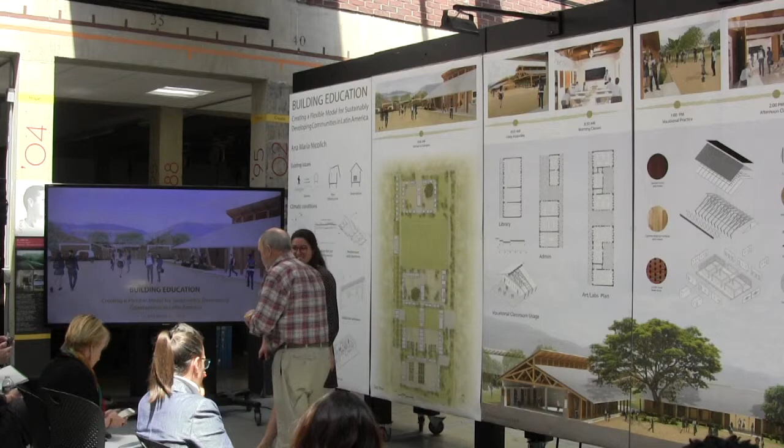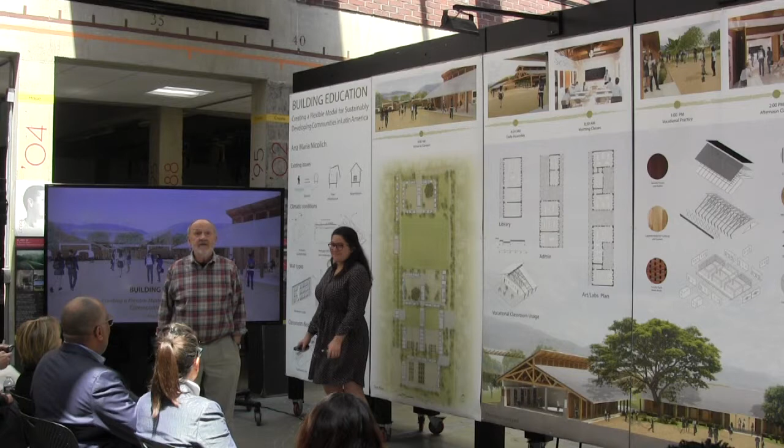So without further ado, we're going to leave North America and go down to South America. Remember that the sun acts differently in the southern hemisphere, right? Please remember that about east and west, north and south, and things like that. And the toilets go the opposite direction. In any event, Ana's going to take us there and show her project, which is in Peru.

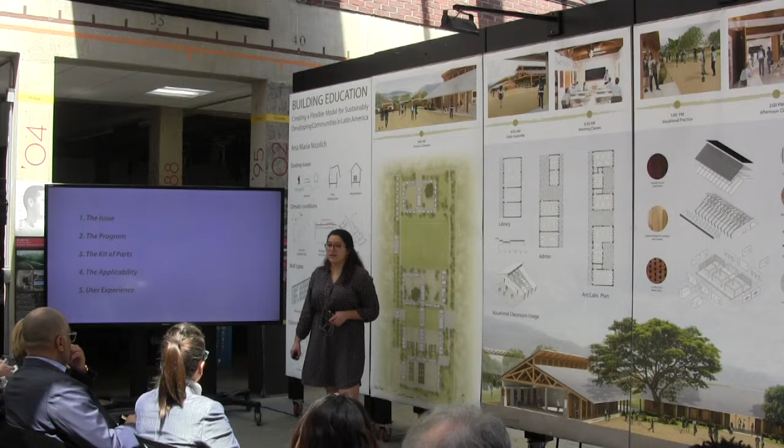Right now, I would like to talk to you about building education and the design of a flexible model for a high school for sustainably developing communities in Latin America, and more specifically in Peru. This presentation will deal with some of the issues that have inspired this thesis, how those have led to the creation of a program for a model for a school, the kit of parts that make up this campus, and how it could be applied to different communities with varying needs.

To finish off, I will share some user experiences to get a better idea of how this campus can be used. To begin, some of the research I have done has been through the World Bank, the United Nations, and similar organizations, and they have all concluded that quality education is a key component in order to have a prosperous and successful country.

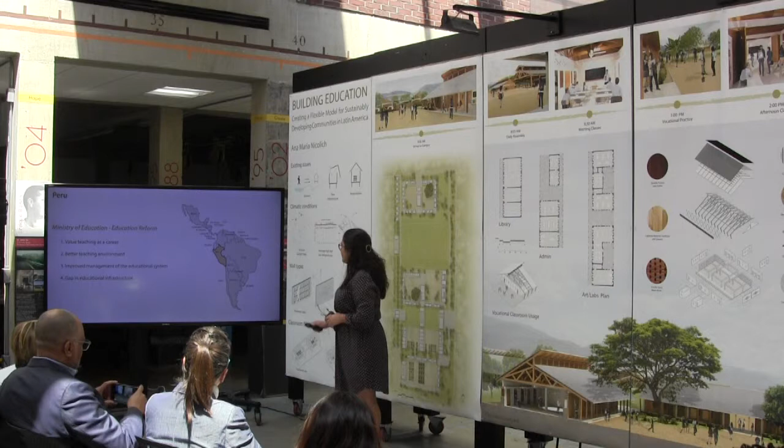Specifically in Latin America, all of the leaders in the field of development currently are making education their #1 priority. We can take a look at Peru a little more closely, and even though there have been significant advances in the education reforms they have done, there's still a long way to go.

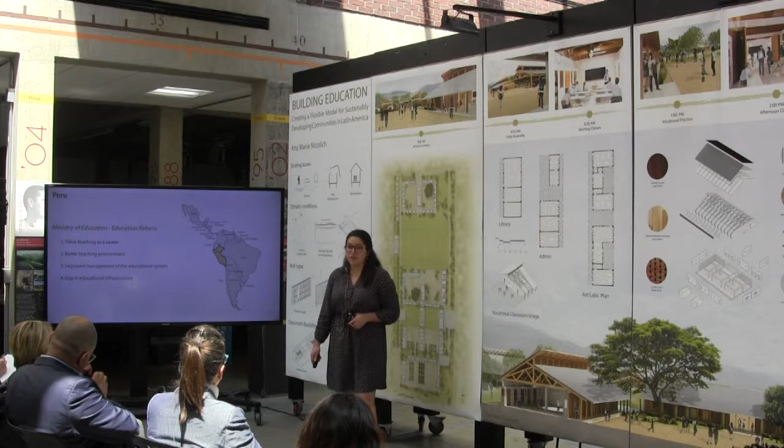Knowing their responsibility and in order to provide quality education throughout the country, they have recently released an educational reform with 4 main points: one is to value teaching as a career; another is to better the teaching environments of these educational spaces; another is to have improved management of the educational system as a whole; and to bridge the gap of the educational infrastructure.

This thesis will specifically deal with bridging the gap of educational infrastructure. But we'll also try to tackle valuing the value of teaching as a career by creating spaces that can help teachers feel valued, and by creating better teaching environments for improved learning.

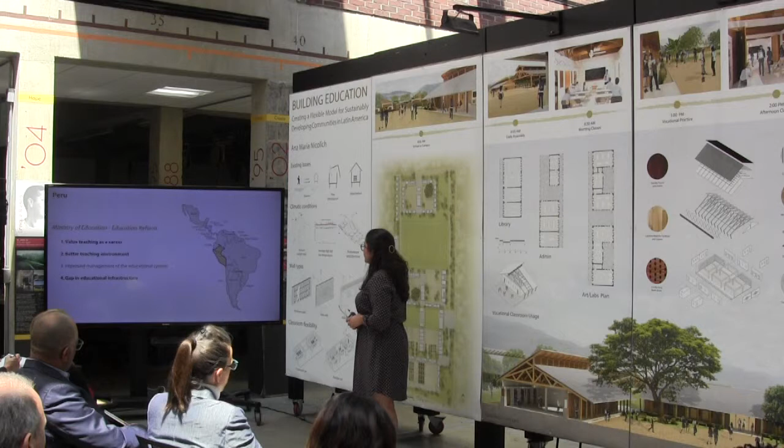Unfortunately, currently in Peru, there's only a 65% completion rate of secondary school, which consists of 7th grade through 11th grade. The 35% of students that do not complete secondary school are going through hardships with their family in terms of financial means, and so they end up staying home and working for their families, or they might lack motivation because they've seen that their parents didn't finish high school, so they might not be as motivated or encouraged to continue on.

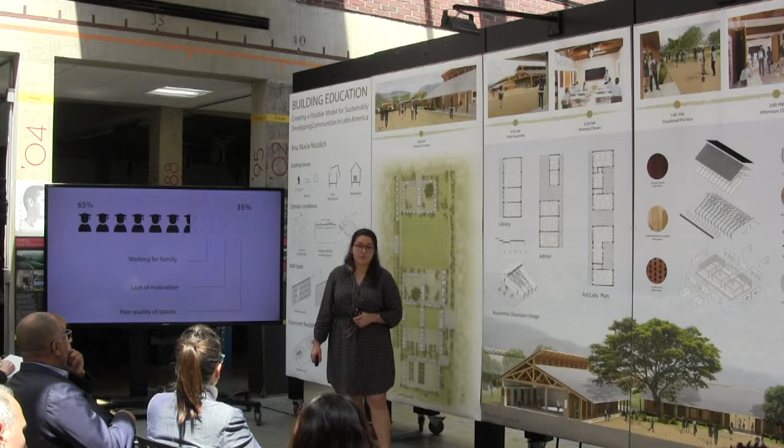One of the main reasons is the quality of the spaces. I will show you some imagery in order to get a better grasp of the state of the infrastructure over there, and here you can begin to understand it.

A lot of the classrooms might be -- sorry, I forgot to mention that all of these issues are most prevalent in the Peruvian Amazon, and that's where this thesis is located. So here you can start seeing some of the infrastructure.

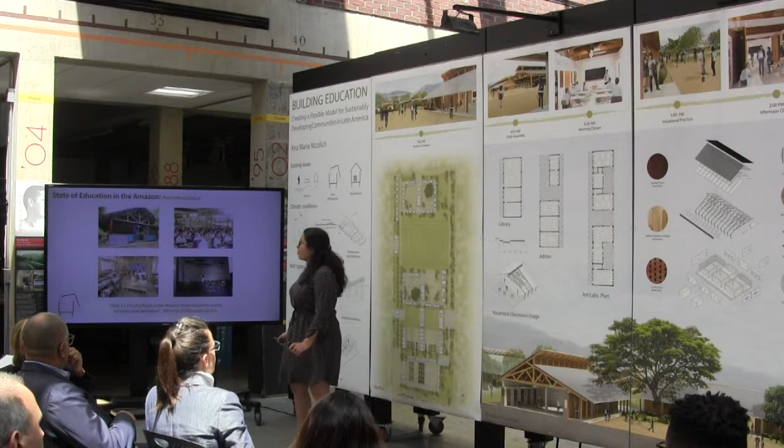They use roof systems that do not necessarily respond to the climatic conditions, providing poor acoustical conditions in the classrooms, and they have very few resources. Some classrooms even have missing roof parts.

This poor infrastructure, combined with long commutes to classrooms, leads to students not completing school. The Peruvian Amazon takes up 60% of the Peruvian territory, so you can imagine how much of the country is dealing with similar conditions.

The average commute for a teacher or student is about 5 hours a day, and that commute usually happens either by the peque-peque boats you can see in that first image, or by walking, or through public transportation on scarce dirt roads.

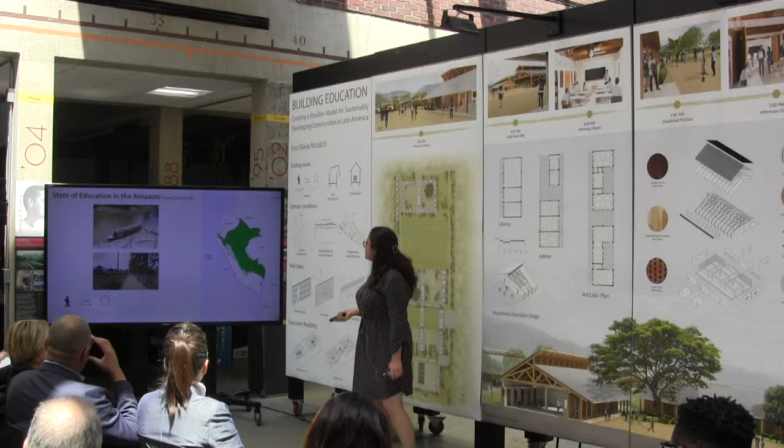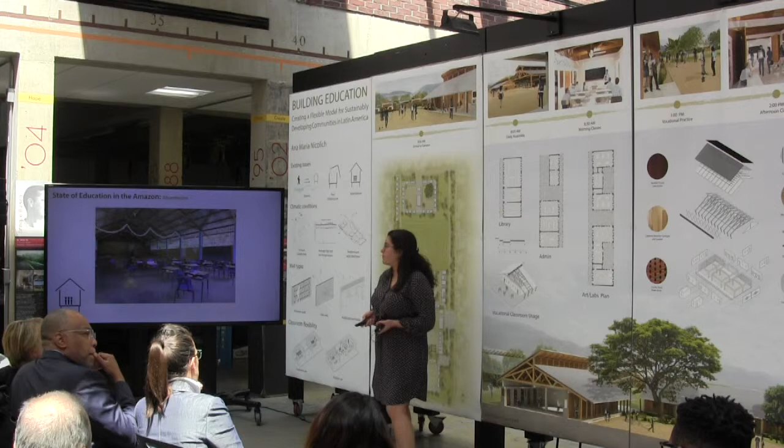Both of these issues, the lack of proper infrastructure and lack of motivation, lead to absenteeism in the classrooms, and this leads us to the need for an architectural response.

In order to test the model for this school, a site has been chosen for a case study in Satipo, Peru. The choice for this site was based on the region with the most need.

A quick look at all of the regions and their current state of infrastructure, along with how many schools currently need restructuring and revamping, led to the choice of Junín, located right in the center of Peru. Within this region, the province that needed the most help was Satipo.

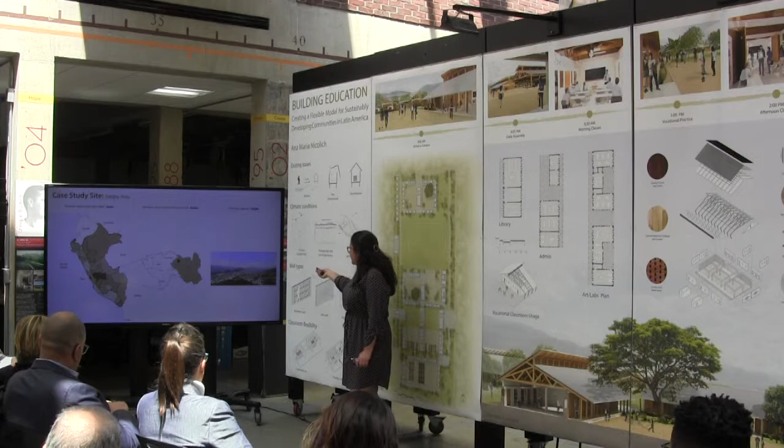Here you can get an aerial view of this provincial capital. This provincial capital is a good representation of many towns in the Peruvian Amazon, showing a typical amalgamation of the different community types in this region, including mestizo people and indigenous native populations.

In most of these provinces, the communities tend to be pretty segregated, and many of them are currently trying to fix that so that the different community types can interact a bit more.

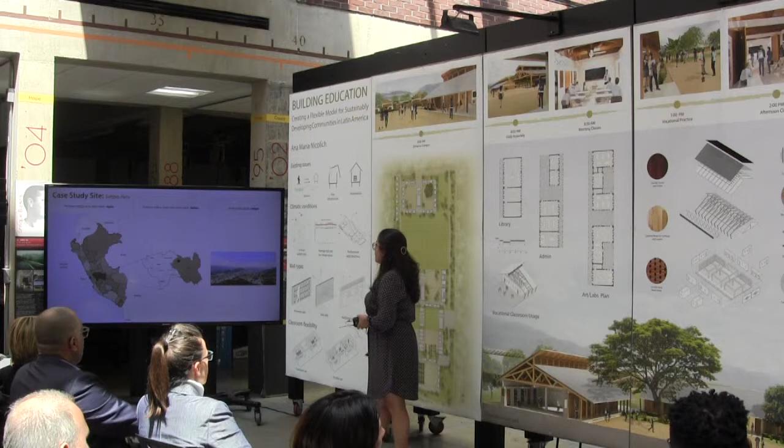If we look at the site a little more closely, we can see that it's situated in the northern part of the town of Satipo, which has a population of 30,000 people.

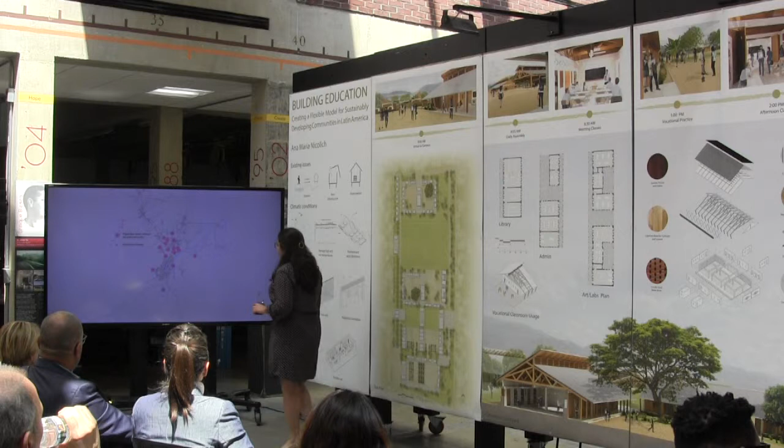It was chosen to be situated in this part of the town because this area is intended for future growth, and that, compiled with information on the locations of existing educational infrastructure and populated centers with need of educational facilities, located the site right in the northern part of the town.

As Carl mentioned, here's a reminder that because the site is located in the southern hemisphere, the sun path will be different than what we're used to. This influenced the location of the educational buildings, creating a preference for classrooms on the southern side of each courtyard for better ambient light and better learning conditions.

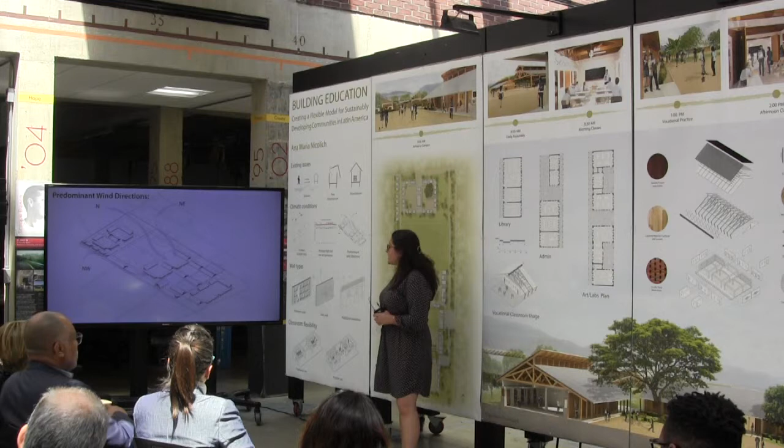That, coupled with the predominant wind directions coming from the north, northeast, and northwest, meant that most of the classrooms were located south and on the eastern and western ends of the courtyards, leaving the northern part of the courtyards for support, restrooms, storage, etc.

This campus is organized off of a main corridor where each of the courtyards stems off of it, juxtaposed by a service entry and exit on the opposite side of the campus in order to service the cafeterias and all of their service needs.

All of this comes together in a program divided into dormitories on the northern part of the site, in order to house students so that they don't have to endure long commutes, so that they can live there during the week and rejoin their families over the weekend.

These dormitories are separated by a soccer pitch right in the middle, so that there could be a little buffer between the dormitories and the classrooms.

On the southern part of the site, we have the student learning spaces and the community classrooms, in order to engage adult learners, to have them come back and finish school or take part in activities over the weekend, continuing their education and hopefully inspiring and promoting learning at a later age.

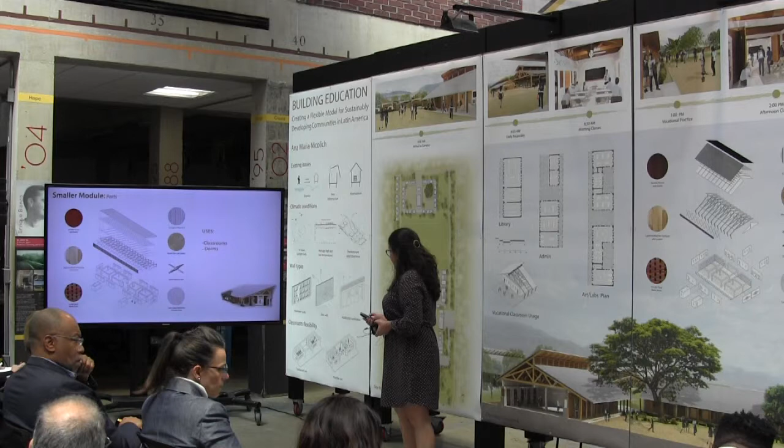This smaller module can house classrooms and dorms. In this model, you can see that in the classroom module, the outer wall can act as storage space for lockers, and here with two thicker walls on one side, you can have storage for books and such. We will take a look at how it can be used on the exterior.

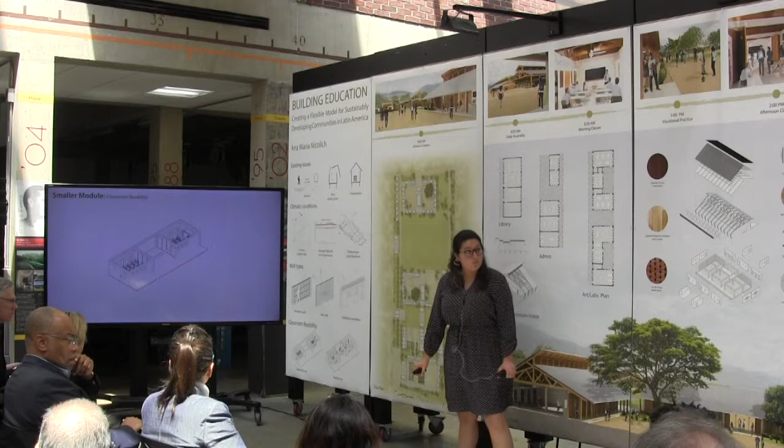These classrooms can be aggregated so that any classroom joined by an open space can eventually be converted into a classroom triple its size for larger activities and better learning. Here we can see an image of what those classrooms would look like if all of their doors were opened and all of their spaces joined for activities in the center.

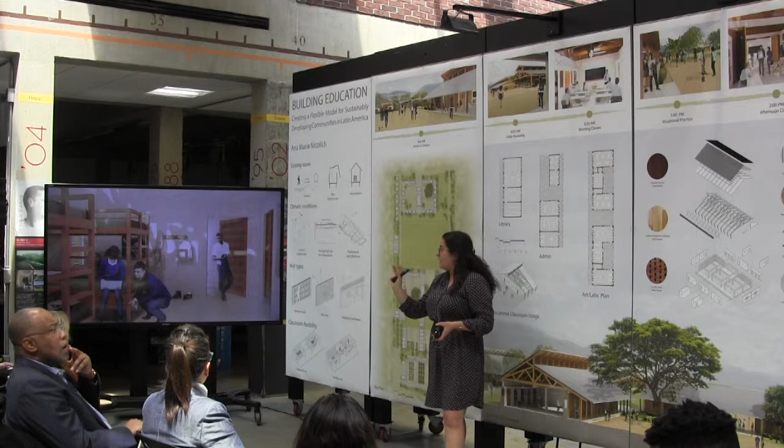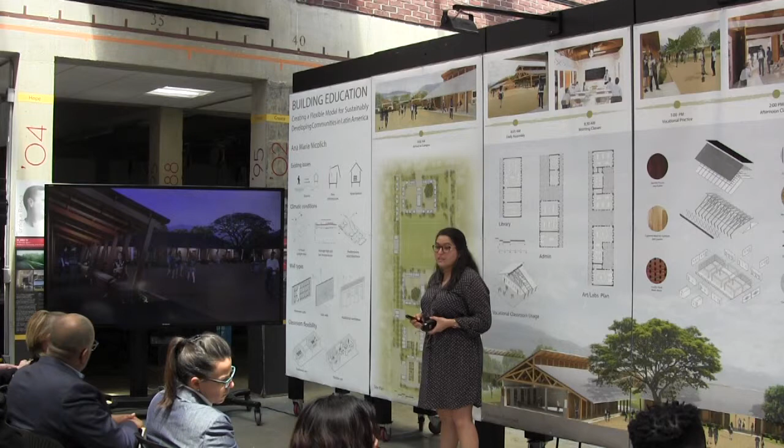That same module is transformed very easily into a dormitory. In the classroom, the outer wall was used for lockers; here it gets flipped to the interior for storage of clothing and student belongings. In this view, you can see a night rendering of some of these dormitories aggregated in a courtyard where students might gather after classes nearing dinner time.

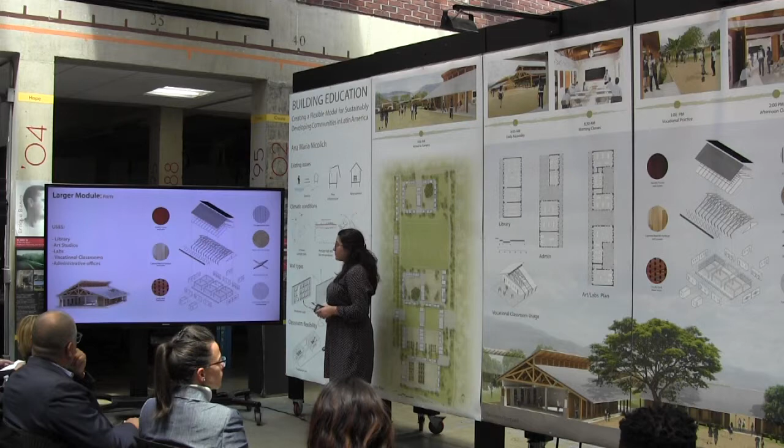If we take a look at the larger module, it's composed of the same building materials, and the only difference is that it's twice as wide, which allows it to house programs such as the library, the art studios, labs, vocational classrooms as required in their curriculum, and administrative offices.

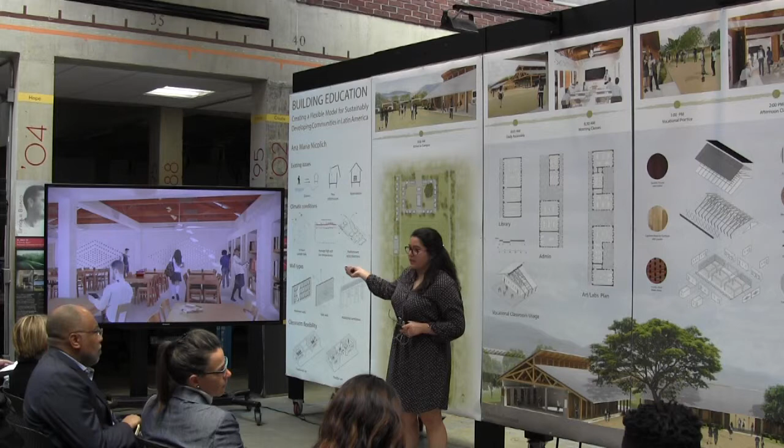Here's a view of one of those spaces, the dual module used as a library, where you can also see that the thickness of these walls is taken advantage of for storage of books.

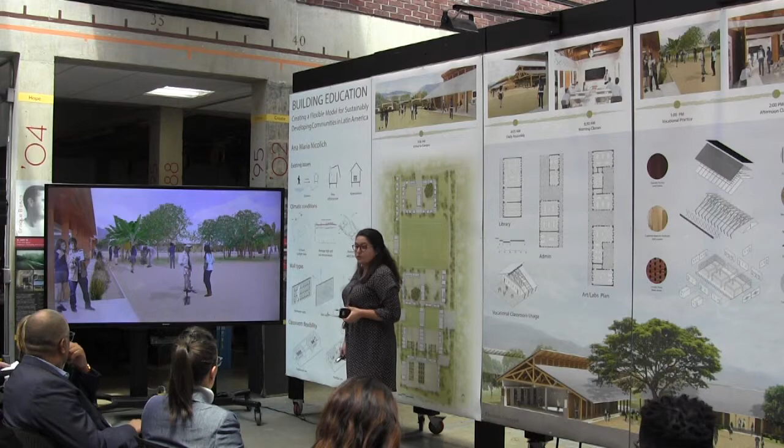Here we can see a view of the community courtyard located at the southern part of the site, where students can interact with community members to learn more about their environment and cultivation in their area, in order to have better respect for their environment.

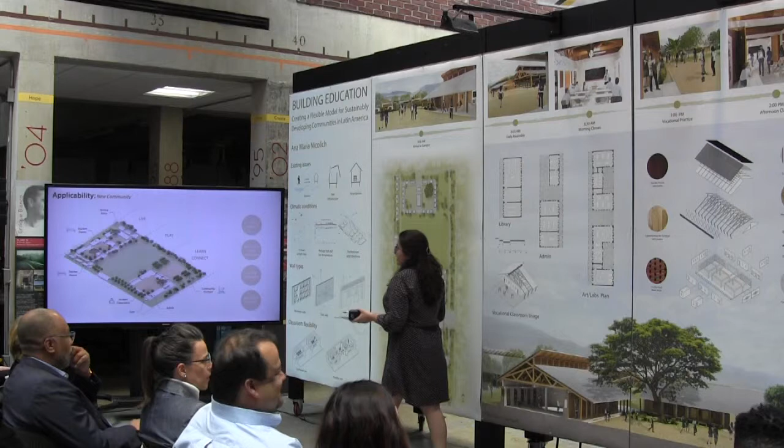To understand its applicability, the scheme I was going through was the middle one on these boards, in a site with about 30,000 inhabitants. If the site is located in a more remote area, where students would commute even further but there would be fewer students, there could be a program with fewer classrooms that houses all of the students.

In the first scenario, a third of the students were housed. Here, all of them would be housed. So quite easily, you can see the courtyards replicated to house more students, with these courtyards shrinking in order to fit all of the program.

In a community that is slightly larger and more developed around it, the site could possibly be located in a brownfield where there's a lot of residences nearby, so students would not need to reside on campus. All of the space previously used for dorms can now be used for the separation of the 10th and 11th graders, where the 7th, 8th, and 9th graders would be in their own courtyards.

To get a grasp of how these spaces are used, I'll introduce you to Paula, a student who represents a third of the student population, and she lives 5 hours away. During the week she cannot commute to school, so she lives in one of the residences there, then enters the campus and joins the rest of the students for their activities.

Then we have a teacher who resides on campus so that he can also avoid long commutes.

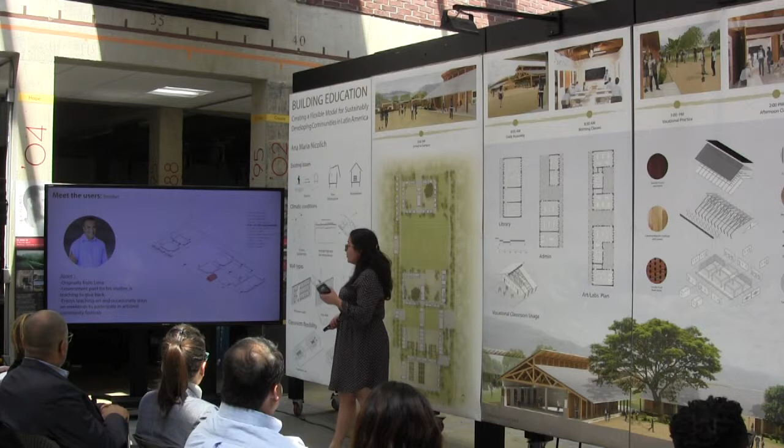And he very much enjoys arts and artisanal activities, so he comes to the campus on the weekends occasionally in order to partake in activities in the southern courtyard with local community members.

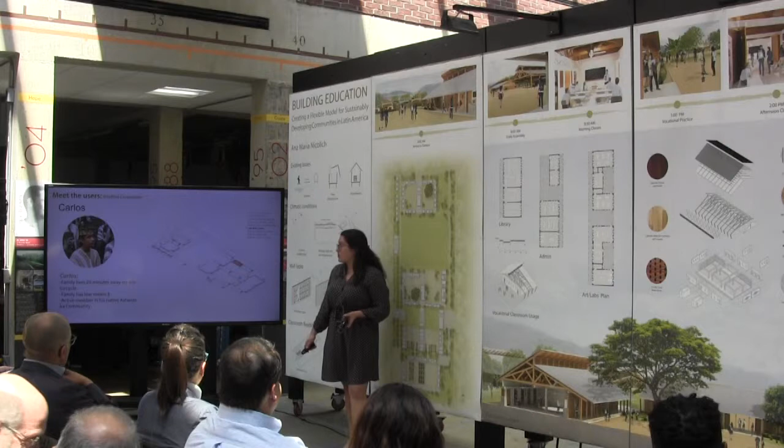Then we have a student commuter who only lives 20 minutes away, but because he has low means, he takes advantage of eating at school. So as soon as he's there waiting for the General Assembly to begin, he's having breakfast with a lot of his classmates.

And then to end, there is the adult learner, Maria, and she dropped out of school when she was younger, and so she decided to go back now. So she's taking advantage of these community classrooms. And because she's skilled in weaving and textiles, she is able to teach some of the students and partake in these activities over the weekend.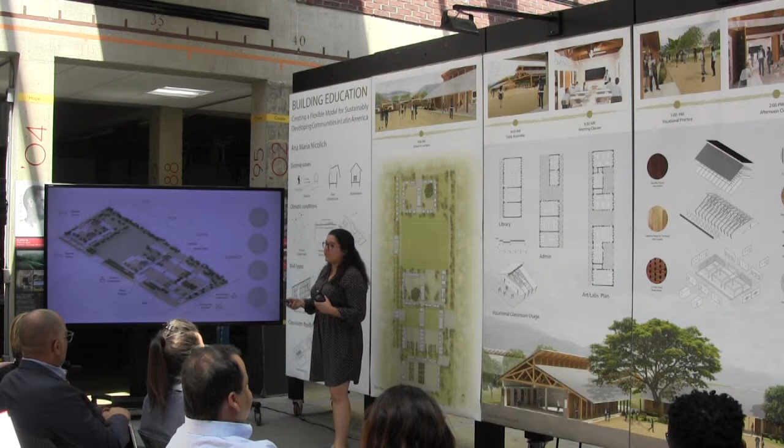So overall, I hope that I've transmitted the idea that this is a very flexible and adaptable design that can be used for varying needs of communities. And with that, I would like to transition and open it up for questions and comments.

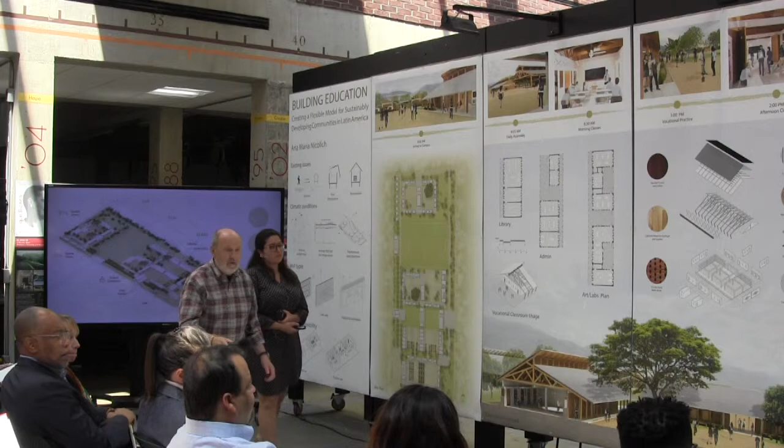What, can you just clarify, in this perspective right here, what is... I'm in so much trouble with Kelly. You guys want Carl back again, right? You guys gotta talk to him.

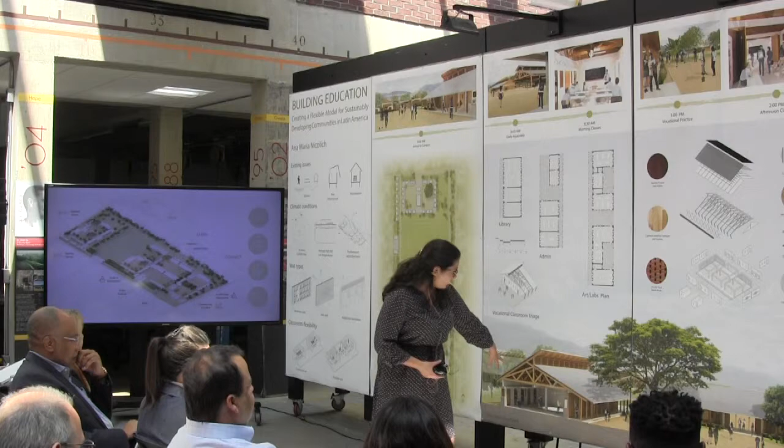Point of clarification, in the perspective down here, what is the building that's beyond the — you said there was two modules, the major and the minor. So this is the smaller module, which is a classroom. This is the larger module, which is the library. And what's that building you're seeing in the back? That's the assembly pavilion that you saw in one of the earlier renderings.

Okay, so there are three different typologies, if you will, that make up the campus. Yes, and depending on the size of the community, they might or may not have one of these assembly pavilions. Thank you.

It's interesting because I intuitively think there's some strength in the idea to create a flexible community that can grow and expand as the needs of the community change and adapt over time. And I think there's some wisdom in having a simple kit of parts, as you talked about, this flexible base structure that I'm sure we'll discuss in more depth. But my instinct as I was listening to your presentation, looking at the campus, is that a third building that might have anchored it a bit more would have been needed. I was wondering if that was being ghosted in, and if so, it would have been nice to see a little bit more.

Or perhaps you can tell me why you didn't develop or articulate that building a little more. Again, I think there are good reasons you've talked about in terms of why the roofs do what they do in terms of solar and wind. But I wonder, was there any space or need for that third building to potentially be a spot for nighttime use? For example, if you've got people living on this campus at nighttime, they're probably not going to be in the soccer field. So is there some kind of more evening, enclosed space this could have had? And could that have had a slightly different architectural vocabulary? Did you think about that? Did you explore that?

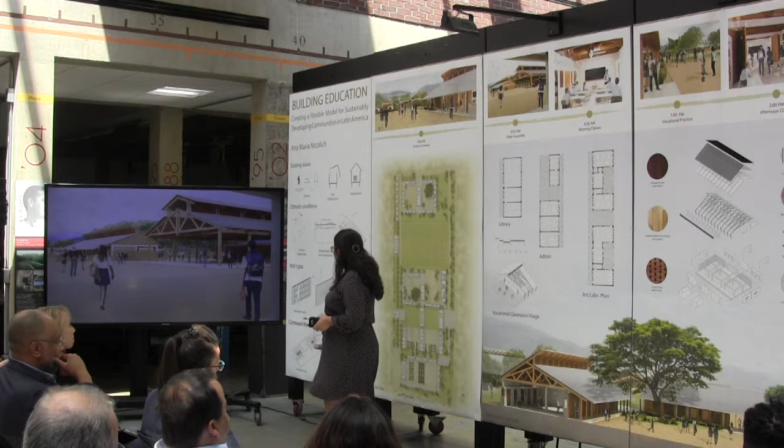Precisely, yes. Part of the community aspect of the building and the vocational classrooms allows students to learn directly from the crafts and skills that are innate in these artisanal communities, but unfortunately are not passed on through generations. As you can see in some of these wall types, and clearly in the model too, I've incorporated symbols that are important to these native communities. If local community members build them, they can apply these symbols in the pattern work of the brickwork.

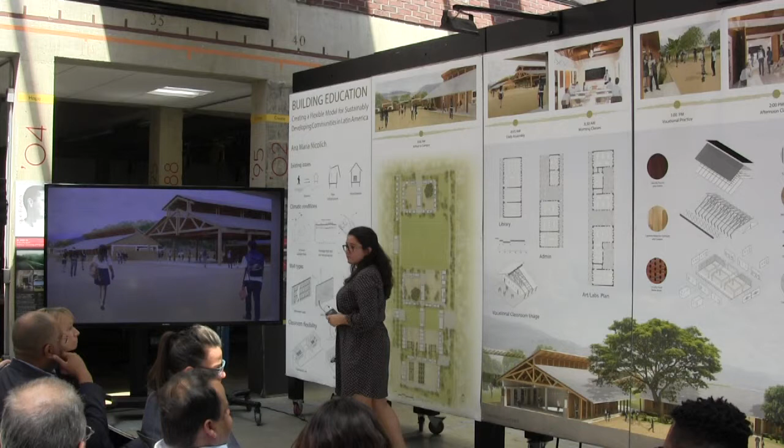Point to where that assembly building is that you're talking about. Right here. If you enter campus right through here, that's the first structure you would encounter.

What are the buildings you first encounter here? So all of these are part of the community classroom, so the students wouldn't necessarily use them. This would be an entry gate, and you would pass through here, and these are all administrative offices.

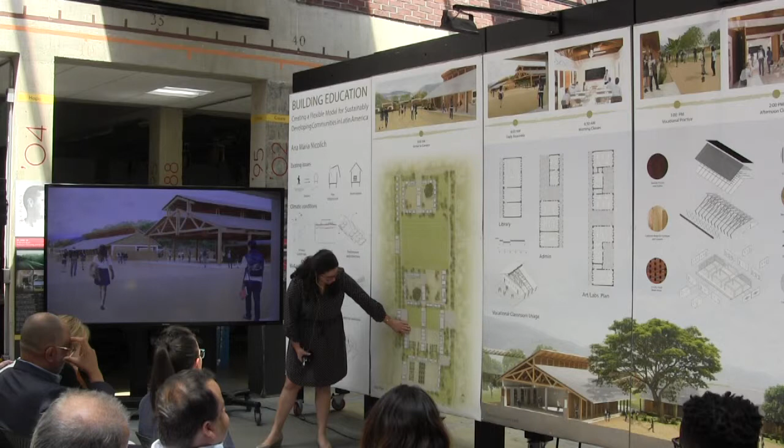Ana, you've given us a lot to look at and absorb, and I applaud you on that. I think we're going to be able to dive really deep into a lot of this, given what you've been able to show us in the model.

I'm wondering, could you talk a little bit about the approaches to ventilation versus sunlight and fenestration—where are things really for ventilation and where are things actually to bring light into the building? It doesn't seem like you're using the area up top here in this rendering for ventilation because you've put a roof structure underneath that, right? So I'm curious what the purpose of that element is.

There are also little aspects down here that in your renderings show light coming through, but I don't think they're actually going to ever see light, since the canopies overhang very far. So if you could just talk a little bit about that approach, and any process along the way that led you to how you got to that.

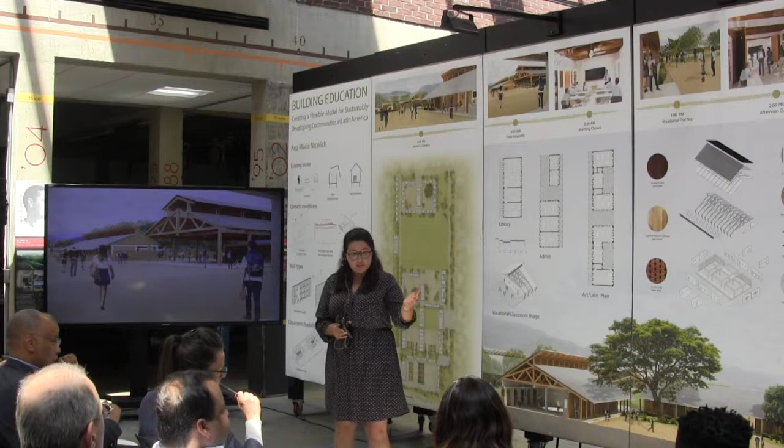Sure. I think one of the main priorities in the design was to prioritize ventilation, being that their average temperatures are in the 70s—we didn't need any formal HVAC systems or anything like that. So taking advantage of these passive systems, I wanted to include as many openings in the building as possible. But after seeing the model, I've noticed how little openings the building actually has. Moving forward, I know I could potentially flip the openings so that within these bays, instead of having lockers, I could prioritize openings for more ventilation and slightly less storage.

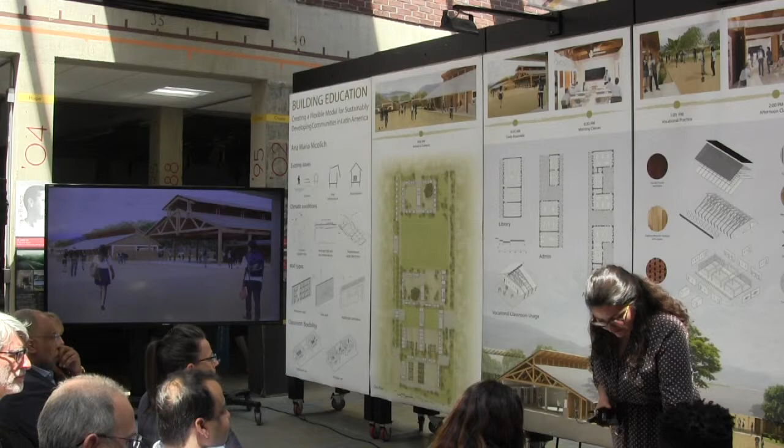The overhang is so deep that you're not actually going to be getting any light into those spaces, so then it's left sort of to the ends, and in many cases the end is very closed in. Yes, so this module is located for the more ideal classroom setting, facing north that way. So the northern side gets all the ambient light, and it's not getting any direct light from this overhang.

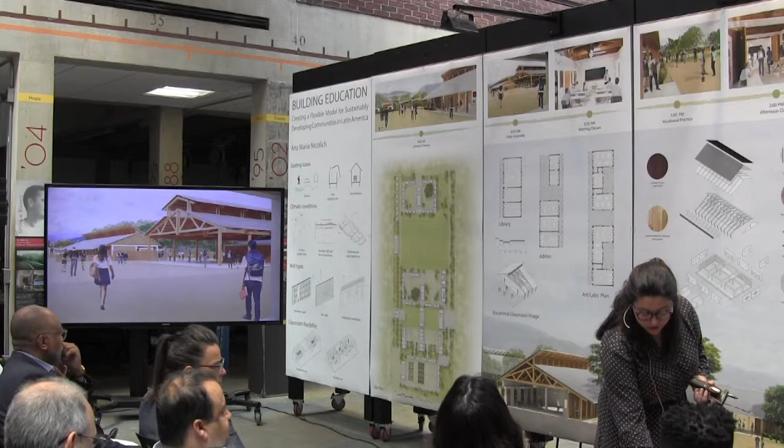So, but I thought there was a roof over this. Yes, there is, inside—so if light's coming in here, it's not actually getting down into that space. The palm leaf screens are actually located just below the purlins, but above the trusses, so all of that space is open.

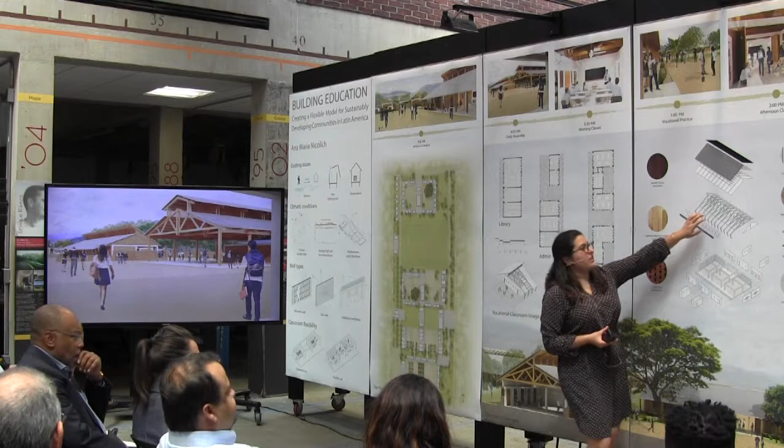Really quick, so in your rendering, there's no ceiling? No, there's not one here—this is the finished ceiling. We were obviously both confused on that. Okay, sorry. Yeah, so here you can see these rolls of palm screens that will be placed on top of the trusses.

For the sake of your drawing, and for the clarity to get this point across, I would just throw artificial lights into that rendering to make the roof structure look a little bit more illuminated. Because right now, I think Colin and I both were looking at the model and thought, oh, well this one's open because that one probably has an attic of some sort. Oh, I think that's where the confusion's coming from. Great, thank you.

What's the hot spot on the floor in that one? That's a mistake in rendering.

Okay, since we're talking about light, I'm like, wow, something's... the photographer's in there. Yes.

You know, it's very sort of regimented, the sort of spaces. Is there a certain proportion or square footage of open space you had in mind for these courtyards? Could they have been smaller maybe, or does it look a little kind of military-like?

The spaces between the classrooms? Yes, I played around with the size of the courtyard a bit, and you can see a slight variation in the residential one. I wanted to maintain a bit of distance between the classrooms because they're so open. I didn't want the sound to distract and take away from the learning happening in these classrooms, so if people are playing in the courtyards, they could be slightly further away from the classrooms.

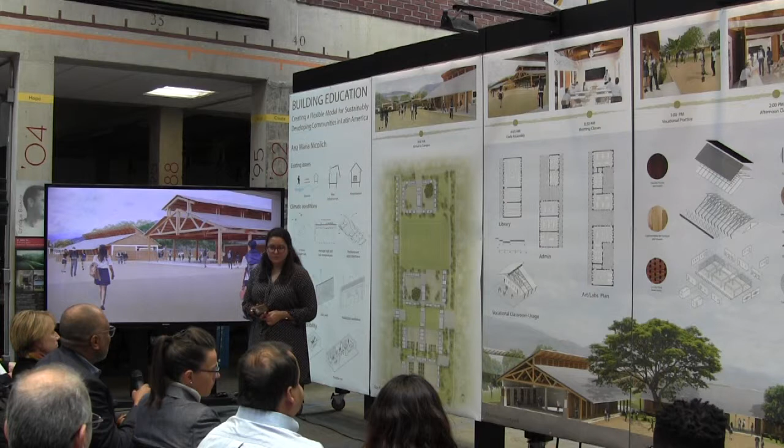Is that there on this site? No, it's not. So you're not working around an existing landscape? No. But you would use trees as a helping site for the project, in order to locate the buildings? Yes.

That was the right answer. Right now I'm just showing this one hypothetically on this part of the courtyard, but let's say if there's another one here. So you would look for trees to keep, and go, we'll use this tree as part of the courtyard. Yes, we're going to build around it.

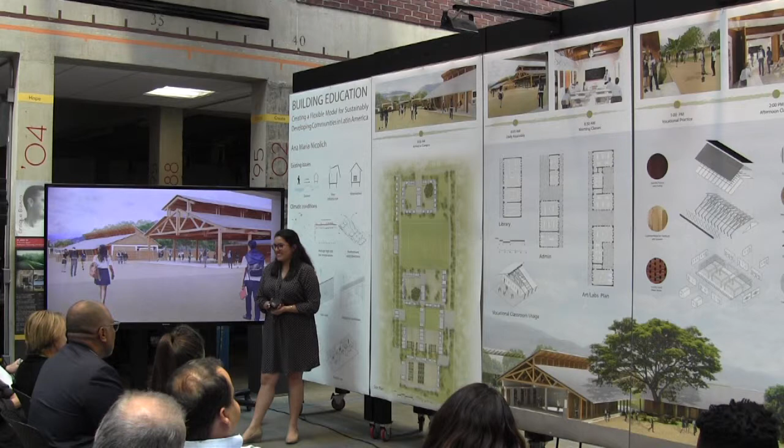That's right, good. I have the same question about the extent of it. I did the calculation - it's about four lengths of this grate space to get from one end to the other. I know you want air to move through, but I would look at the distance of walking on this. It seems a little stretched out, and the actual enclosure seems a little porous at times. I don't know what you'd lose in terms of ventilation and sound, but still, I think it seems stretched out. I'd try to be a little more compact.

Okay. We did have a conversation about how people are getting around campus and if they're walking a little too much, but we figured that based on them really just using certain courtyards during different parts of the day, they're not really going back to the dorm in the middle of the afternoon. So they stay in that area between 8 and 5. Yes, if anything, they're just going up to the field and then going back to the classrooms. Sure.

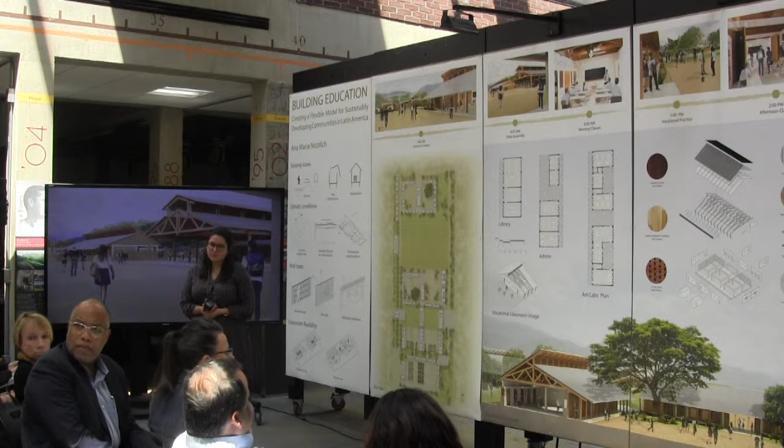So you talked about the way in which poor infrastructure and absenteeism impacted the way you approached this. What's the extent to which you looked at the way the community views space and uses space, and how did that community perspective influence some of these design moves? You talked about other courts where this big tree is in surrounding cities, so you must have looked around and seen the way design happens in these small towns. How did you pull from those cultural references to do what you did?

Sure. One of the main drivers was that a lot of these community members, especially the indigenous and native ones, are very much connected to their environment and very respectful of it. Unfortunately, a lot of the mestizo communities are tearing down a lot of their forest. So as a way of reconnecting back to nature, I provided them with some orchard-like spaces within the community courtyards and spaces for crops, so they could look out onto these courtyards and connect back with nature, and learn from each other since they'd be mixing these communities within the same campus.

I think you've presented some really beautiful drawings. I'm particularly pleased with the form and the tectonics of the buildings. They really express this idea of groundedness with the masonry construction, and then a tectonic clarity, a net cast over those stereotomic spaces, making a kind of wood construction overhead. So I think that's to be applauded.

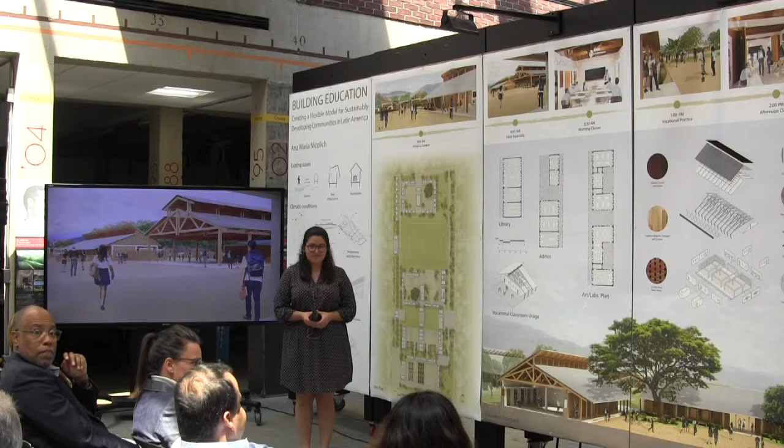And in terms of compactness, one thought is that it might be a solution of scheduling and programming, where the adults could use the classrooms that the children are using in the evening, and you don't even have to build that lower third of the campus. It's how you creatively use it, like our building here - it's empty all summer, but now we're using it in the summer, in the evenings, for the other programs the school has added over the years.

Sure, thank you, that's a great comment. A little bit of that I explored in this smaller design, where I've gotten rid of the community courtyard altogether and hoped that they would utilize the same classrooms in the evenings, so there would be that kind of usage of the spaces.

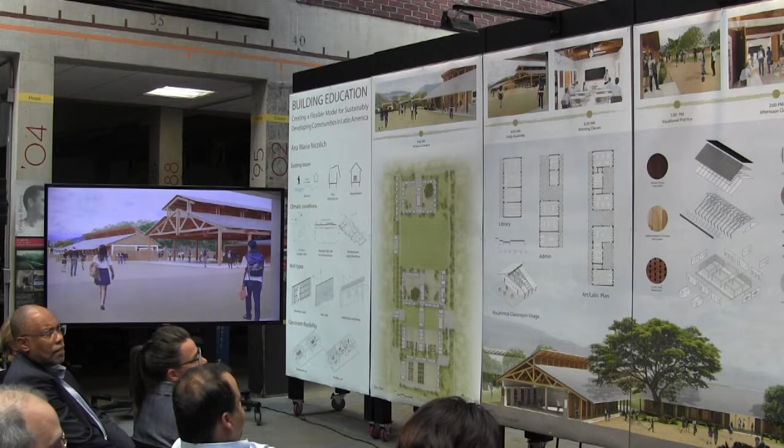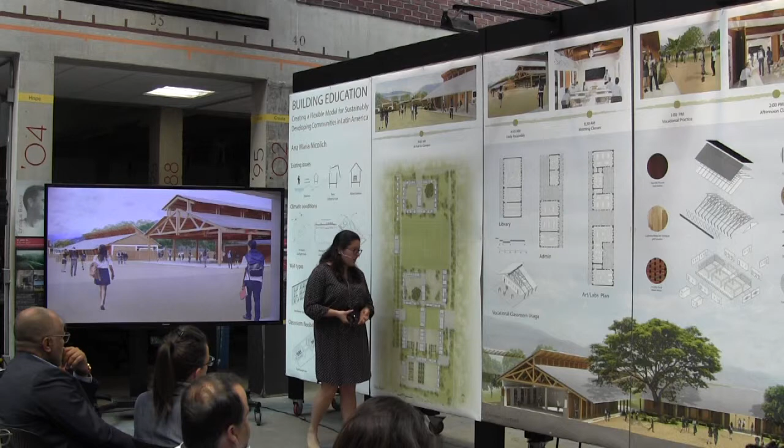In terms of your comment about the lack of hierarchy, originally I didn't have this covered pavilion in the middle of their main courtyard. I was hoping for this to be the main space where all students would gather between classes, because this is the general assembly building, this is their cafeteria, and so there could be a lot of spillage between these buildings. But looking at the size of it, it seemed awfully large, so if students wanted any kind of coverage, I ended up placing a pavilion right in the middle to provide a shaded area. Perhaps by eliminating that and substituting it with more landscaping, that could provide a sense of a larger courtyard and more hierarchy there. But I understand there could be more done in that aspect.

Take a look at Saarinen's plan for Cranbrook.

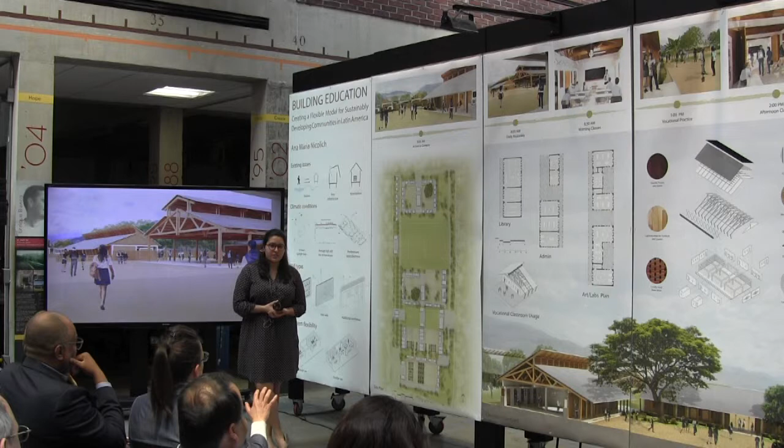Remind me, did you give an age in general for the students? Yeah, so it's 7th graders until 11th graders.

One thing that strikes me is it lacks a little bit of fun and excitement. We do educational spaces for students all the time, and we try to make them the most engaging spaces possible, and I don't know enough about Peruvian culture, but the one image you showed was brightly colored. So part of me says, is there a palette within the materials you're working with, or a differentiation within those palettes? You show a really dark wood and a really light wood, but everything seems to have the same monotone nature to it. I wonder if there isn't something that can be had in excitement of materials, or some fun for learning.

No, that's a great comment. As a matter of fact, at one point I considered painting these buildings on the outside based on their users - so the 7th graders would get one color, the 8th graders another, so there could be a sense of identity with the structure. Not really sure why I didn't keep pursuing that route, but from my research, it did seem that creating something fun like that to help students identify with their home bases was a very good use of their spaces.

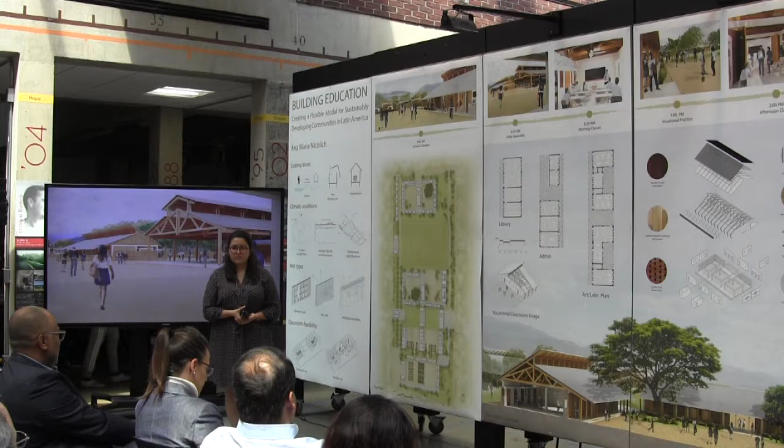I want to compliment you for getting to where you've gotten with this large section perspective in the foreground. The drawing is very effective, I think, in conveying an enormous amount of information at a glance. The thing I'm hearing from people is really about homogeneity - that there's a homogeneous quality to things, noted in terms of the landscape and the materiality, and I would even say the modularity of the project contributes to that, and really goes back to begging for there to be several unique pieces that would stand out as maybe breaking the rules.

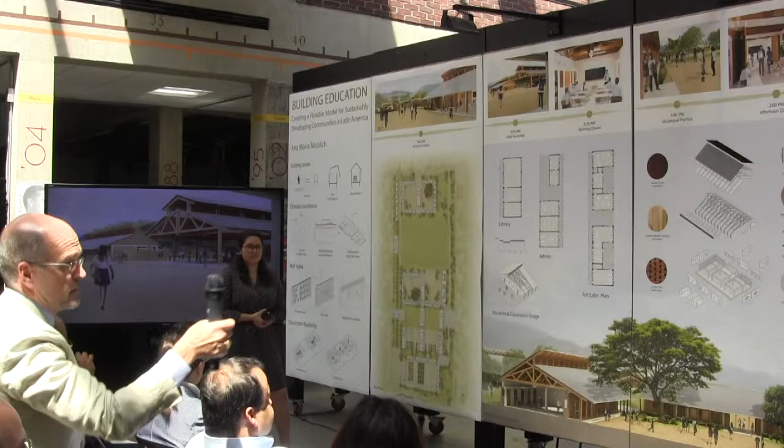Yeah, thank you. I just wanted to piggyback on the playfulness comment and connect it to the comment about natural daylighting. I'm wondering if this material is possibly a little bit underexplored, especially given the culture of weaving and how that's a skill.

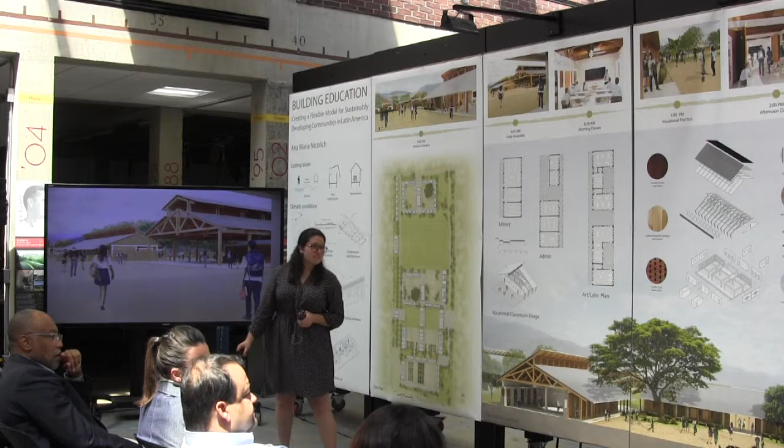I wonder if there's a place for woven fabrics, even ones that are porous, that can act almost like mosquito netting—instead of a roof in some places—to let in natural light and keep the bugs out. I know here in the United States we're much more concerned about mosquito bites, but the woven palm leaves as structure make great roofs because they swell when it rains and keep the rain out, but then when it's dry they shrink and let light come through.

So I wonder if there's a use of textiles and fabrics, both as mosquito netting and daylighting, but also as that playful, colorful aspect.

Yeah, that's a great idea. I think moving forward, that could be the next thing I would explore in terms of expanding the palette and the parts of the kit. Thank you.

In terms of retinal burn, memorable drawings, this section perspective down there is really terrific, and it speaks volumes about what you're seeking to accomplish in the project.

As regards the comments people made about the sameness of it, when Richard Meier's office was given the commission to do the Getty Museum out in California, Ralph Lerner, who was dean at Princeton at the time, said it looked like they had a World's Fair and only invited one architect.

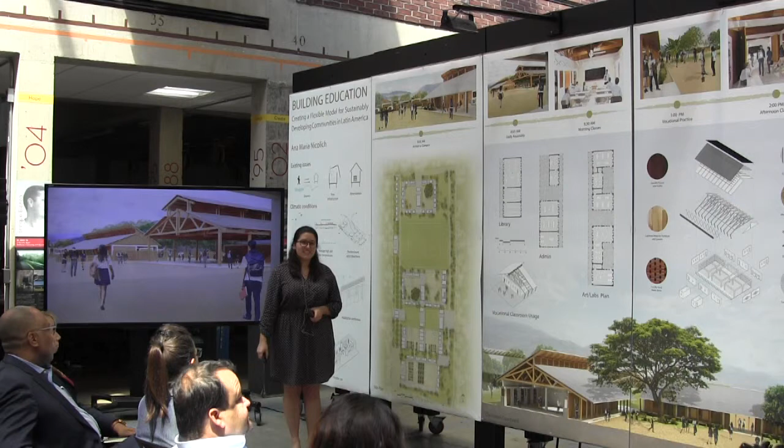What's kind of interesting about this project is the master plan. It strikes me that a school like this probably would be built over time, because the resources tend not to arrive all at the same time to build it.

So then the question becomes, going back to earlier comments, what is the master plan imprint you leave here that others would pick up on in the future and do buildings that would be sympathetic, but maybe not all the same as what you're doing?

In a way, I think what you're making is almost like a little city plan. I think if it was a bit more analogous to a city about pathways and the way they engage the edges of buildings, and the way open space engages buildings, it probably would be a little more successful.

A good example is the soccer field—I can't tell if those buildings face it or have their backs to it.

And these? Go ahead, these? Yeah, yeah, they're facing their backs to the field. They're facing their backs. Oh, that's a clever answer.

I gotta say, that is a thesis student answer if ever there was one. Boy, Ana, if you've learned something at Maryland, that may just be it right there in that answer.

But if that's the plaza, how do the buildings face the plaza? And where are the neighborhood squares and things like that? It would probably go some measure to tightening it up, to make it more analogous in that regard—not literally like a city, but so the main buildings face the plaza and have a kind of graciousness about things that happen there that are hierarchically understandable.

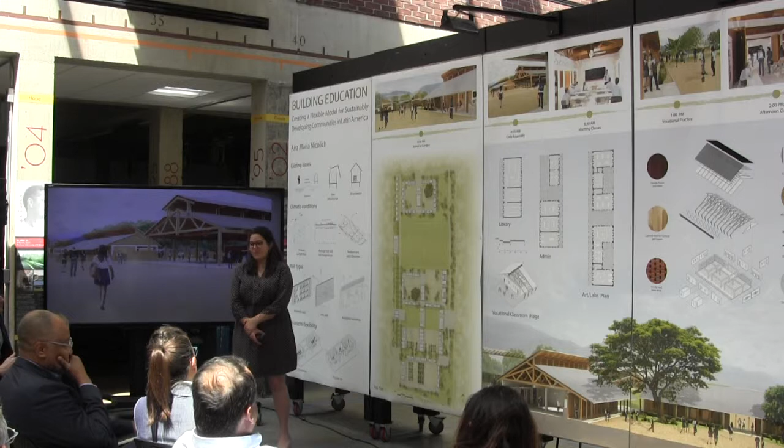Yeah, I think that was definitely. Yeah, but that's the missing thing for me, is these outdoor spaces that are not designed right now. You see just openness, just a corridor or something, but these are outdoor rooms that have to be designed.

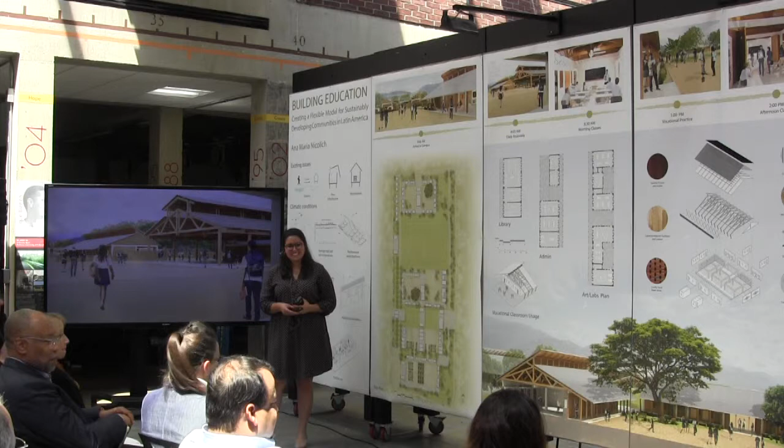Thank you for your model. That's fantastic. And did you make the cube as well? No, it happens to match nicely though. Well, I appreciate that you actually matched your base with your model. I mean, that's an architect right there. You know, you actually thought about it.

So thank you. Details. Did you think about putting solar panels on all the roofs so you don't need electricity there? No, that didn't come up, but I think that would be a great consideration. Yeah.

Yes, I cannot lose the opportunity, since usually I agree with Professor Bell. For once that I disagree, I cannot lose. It's about her, not me.

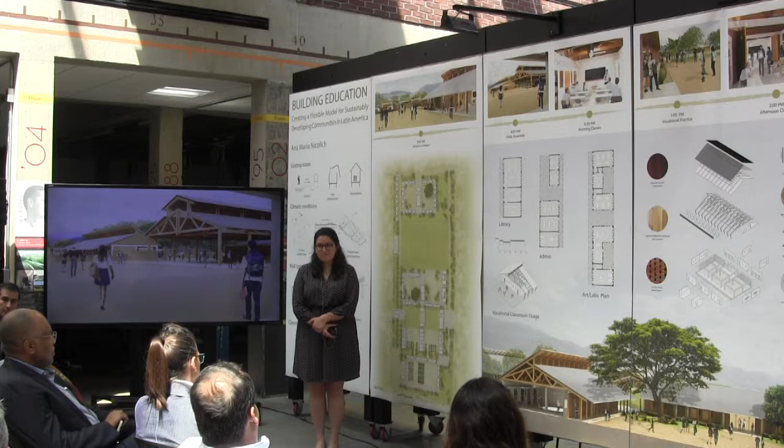So go on. The question, just because you raise a simple question, it's not convincing to me, this idea that the soccer field is the piazza and therefore the units should look at the piazza. The soccer field is a place where some guys from time to time go and kick the ball, whereas from the proportion point of view, the actual piazza is the one that in fact the buildings are facing.

Well, whatever, inside, that one for instance, or the other one up there, or the other one there, right? Yeah, there's. That's enough. Antonio, it depends on how you use it. Did I say that the question of uniformity is not relevant?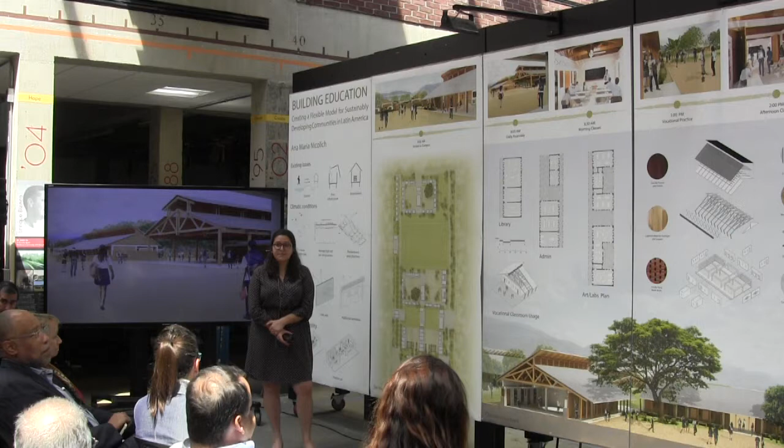Yeah, I agree. Having more variety would have helped. But the idea of facing, since we made a discussion out of that, and it's a good theme, I think each building or many buildings face two spaces. And the idea that the larger space can claim to be more important is not always like that, right?

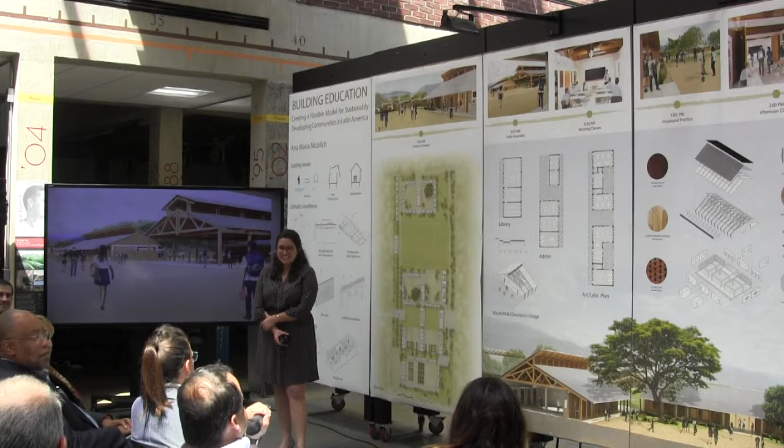Yeah, I think that's a very good point. Have you ever walked on a soccer field? Yes. It's pretty large. It's enormous, right? I mean, it's so big that if you go to DC United Stadium, which Mr. Marshall there knows something about, the field still seems enormous, even with that big building around it.

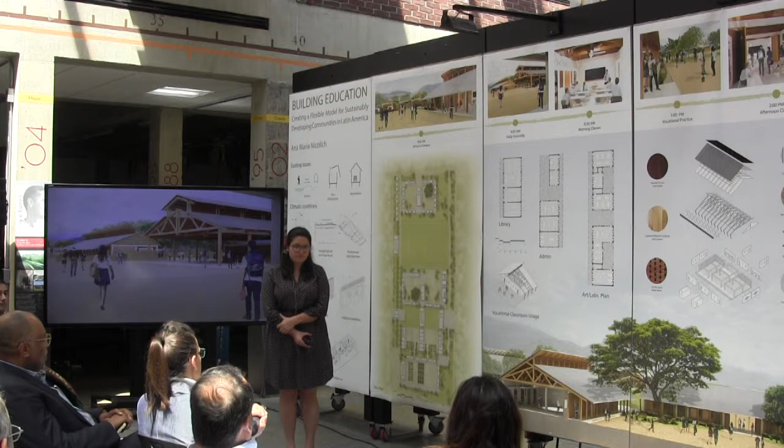So, I agree with what everybody's saying, which is that hierarchy is an issue. And I have to say, you have a very, very beautiful project here, so we'll start with that. But I think that the sense of scale is a bit off here. I think that most of these spaces are actually way too big, like really, really too big.

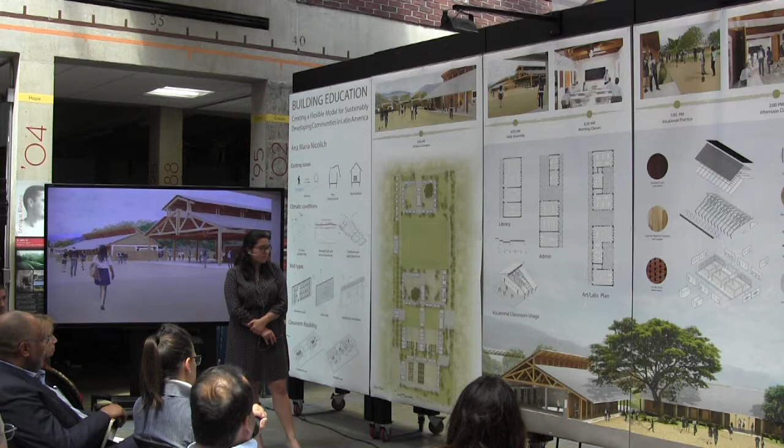If you look at any kind of university plan, you see big spaces and small spaces, and you've tried putting buildings in the middle, which I don't really like, honestly. I would like them to be, I'm giving you two different things, right? It's too big, it's too small.

Pick at that. The other thing I was wondering about, and I'm sorry I missed the beginning of your presentation, but in this perspective, which I agree is really great, what happens down the middle there where it's open? Where is that? So those are connections onto the other courtyards.

Got it, so those are openings that allow for porosity between these. I really like that. If you took a highlighter and drew the circulation paths through there, you'd see that you actually have more major and more minor paths, which I think is really good.

The other thing I would say about the buildings, here's the trap you've made for yourself, right? You've made these beautiful modules, okay? But what we're seeing is what happens when one of the buildings is bigger, or maybe four of them are put together. It's back to this issue of hierarchy. I just think that would be the next thing you would do, because it's hard.

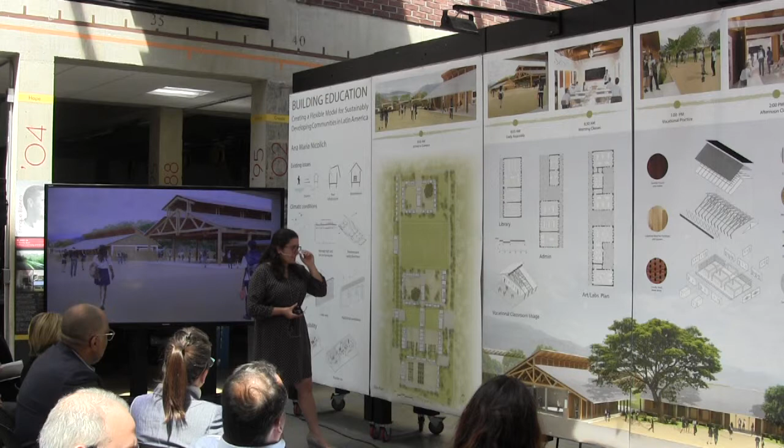Matt's comment is exactly right. It's hard for an architect to get out of your own way when you've designed all the buildings, to break your own rule. It's very hard. To get to that point, there was a lot of back and forth in the design process between working at the campus scale and trying to design the modules. When I first started off by trying to design the whole campus, that obviously changed drastically as soon as I started inputting real sizes of the buildings. I think there could be another iteration back at the larger scale.

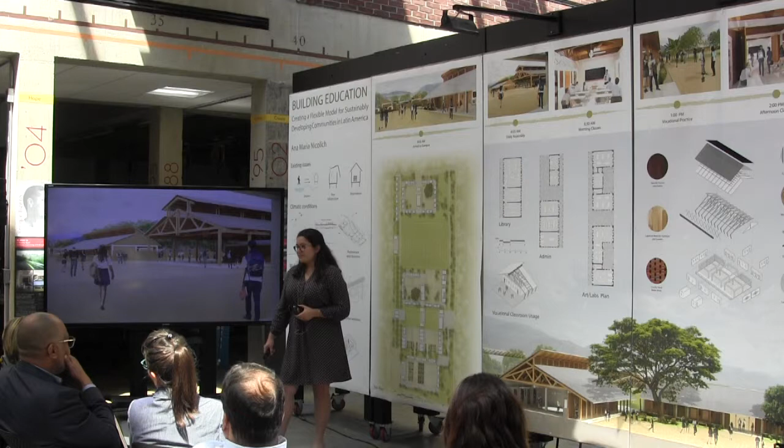Ana, I just wanted to say thank you for taking on a project like this. I think it takes a lot of guts to do a public, impactful project for thesis, so thank you. I think when you take on a project like this, you have to come armed with a lot of other things than in a typical thesis. You need to really understand all the sustainable elements, solar, ventilation, everything like that. You need to have a strategy to explain the hierarchy, and you need a strategy to explain how you've rolled out an idea that could be deployed in multiple places.

I think one big thing that's missing is the way you would manage a site that's not completely flat. I think that's something to add to this. Sure, definitely. Great.

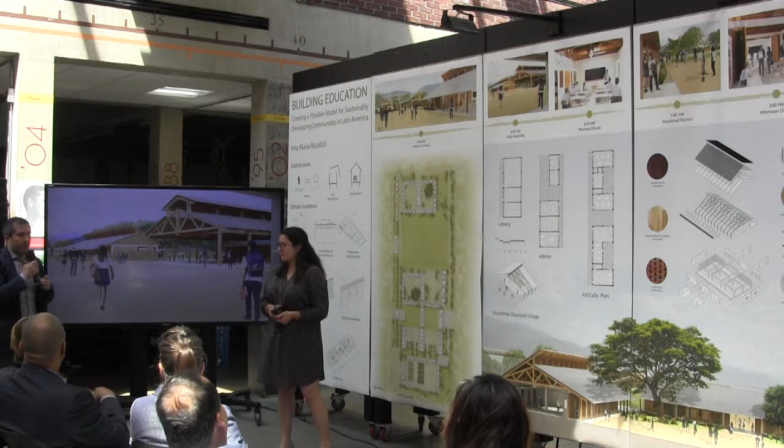And before we dismiss Ana's project, I just want to say thank you for your work. Since Ana approached me with her ideas for this thesis, they resonated with me very much because I also have a Latin American background, and I also share the idea that education is the key to a society's development. So that in itself just made it really important for me. With that being said, Ana, you're a really hard worker, you're very thorough. We had many discussions about this. A half-an-hour presentation doesn't do justice to all the work that you put into this. And I also want to thank you for being so professional in the face of personal hardship.

You did wonderfully. One comment about compactness that I want to say: it's funny because there are many issues that are cultural that get in the way of a project like this. If anybody has ever been to Latin America, for instance the campus of the National University in Mexico City, you might understand what open space means in Latin America. So the issue of compactness, or the size and scale of open spaces, public spaces, plazas—the term plaza says it all—harks back to before Columbus. So there's a slightly different understanding of openness in Latin America.

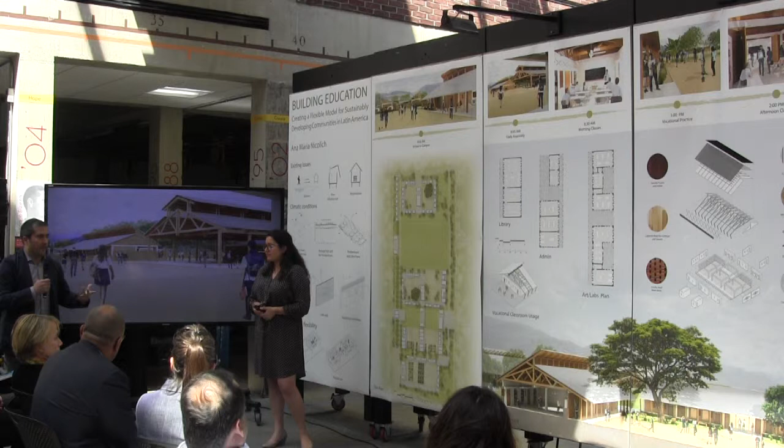That's something that I wanted to say. And I think Ana is underplaying the role that users can give to this set of apparently rigid modules, which can be personalized later on. That was also some of the discussions that we had. So anyway, I want to applaud your efforts and congratulations.

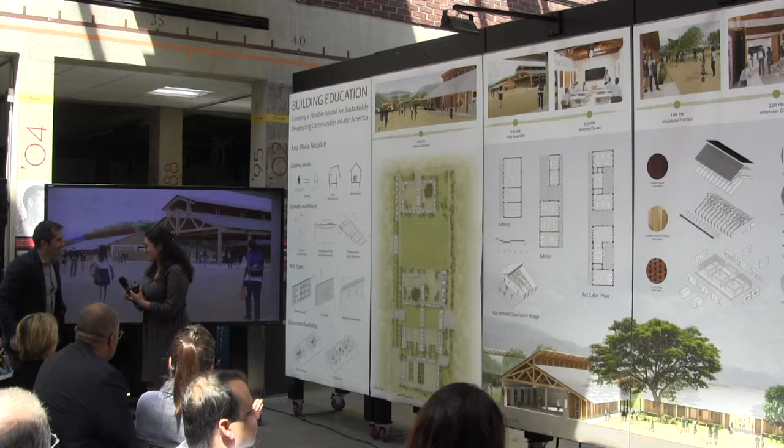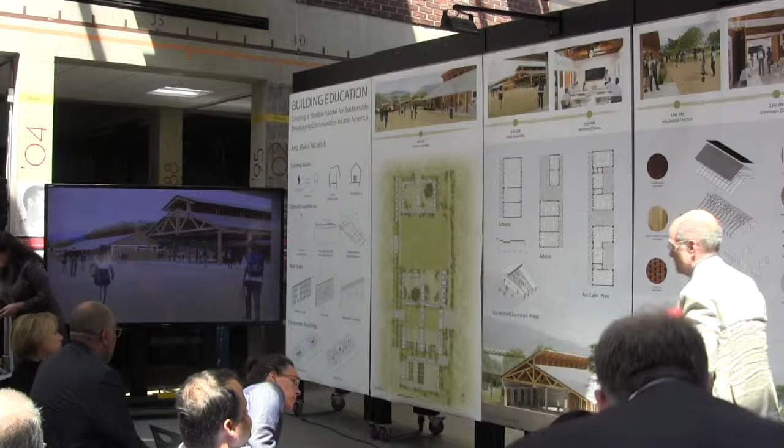That she did this metric. The whole thing was done, metric and all. You got the long measuring stick. All right, we're going to go to the next one.